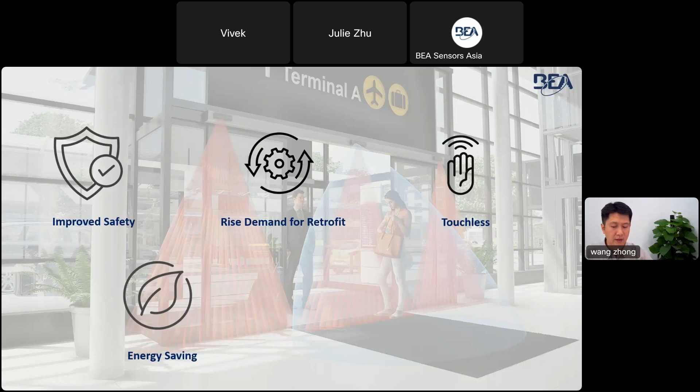Next is regarding energy saving, because the door entrance of the building is really strongly linked with energy saving. The door opening and closing easily loses cold air inside of the building, and in winter, the warm air also easily escapes from this entrance. So energy saving from the entrance is also a very important point, and it's becoming more and more important.

Last one is that the door currently not only functions like a door, just opening or closing, but it's also linked to more functions, such as security of the building, like access control function of the building or office, and also some emergency exits linked to the building management system. So the door becomes an important device of the IoT network. This is also an important development trend we observe.

Okay, this is the 5-point summary for the automatic door development trend.

Okay, so now we understand the market situation and development trend. Let's see how to secure a sliding door.

Before we start introducing the security of the sliding door, we first need to evaluate whether the door environment is a high risk environment or a tolerated environment. So how do we evaluate? Here is a short video to introduce that. It's according to the Europe EN standard definition.

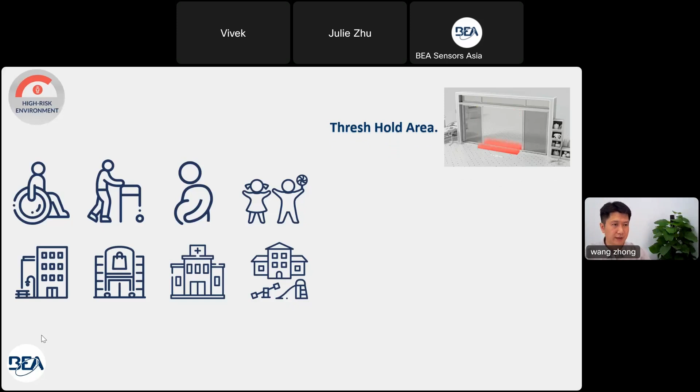So for this kind of high risk environment, what danger points do we need to pay attention to? First is the threshold area. Once the door's moving leaf is opening and closing, the front side and back side of the door leaf, a 20 centimeter area, should be protected. It is a danger point.

Next is the main closing edge, because in the middle, the two sides of the door leaf are closing, and people in the middle could be pinched and hit. It's also dangerous. And the side area - as I mentioned, if people, for example elderly people, stay on the side of the door to rest, once the door starts to open they can easily be hit. This is the high risk environment and the danger points for the high risk environment.

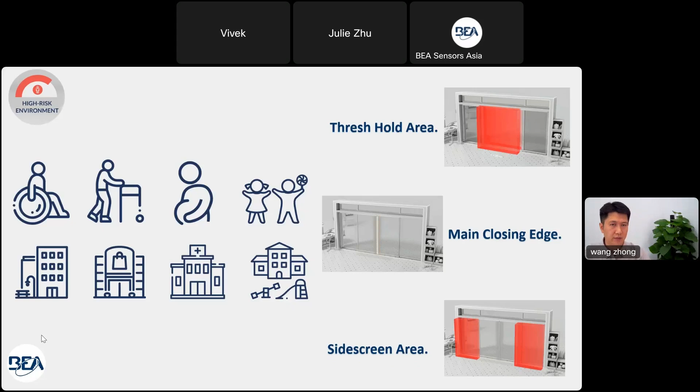Okay, so compared with the higher risk environment, how about the tolerated risk? It's for places like office buildings.

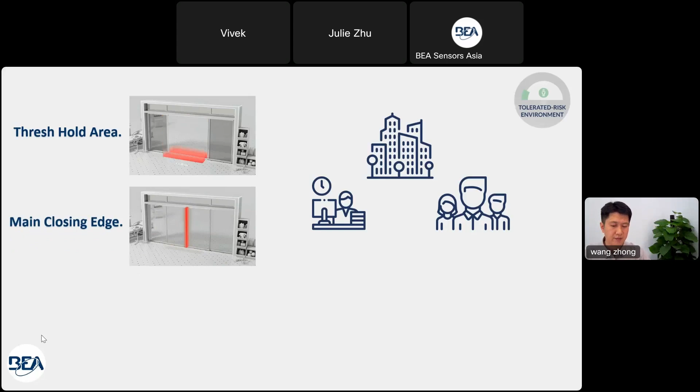But for the tolerated environment, what kind of danger points need protection? It's two sides: one is the threshold area, one is the main closing edge, which need special protection. But for the tolerated environment, there are some special cases we really need to be careful about.

One is for the door: once it's opening, if the gap between the opening edge and the wall is lower than 20 centimeters, this corner is still dangerous. So this corner still needs special protection, no matter if it's a higher risk or lower risk environment. This is a special point needing attention.

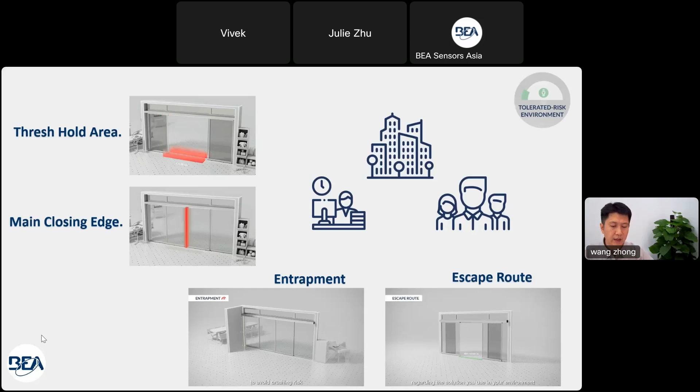Next is the emergency escape route. This is linked with accidents—if an accident happens, people need to quickly leave the building, so the door needs to open earlier. There's a requirement for the opening distance: at least 1.5 meters in front of the door, meaning once people arrive at the door it needs to be fully open already.

So these are the 2 special points we need to pay attention to. Even in a lower risk environment, these two are still required.

For the higher risk environment, we recommend the full safety solution—that means the door front side, back side, and both left and right sides need to be fully covered and protected. For the tolerated risk environment, we recommend partial safety, meaning two danger points need protection: the door threshold and the door main closing edge.

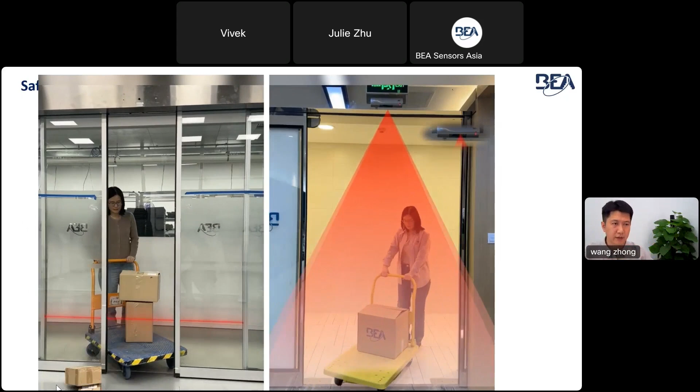So for the photo beam, we really don't recommend using it. Here we've listed 3 kinds of technology: photo beam, infrared curtain, and laser curtain as safety solutions for the sliding door. For the photo beam, neither installation, maintenance, nor protective performance are recommended.

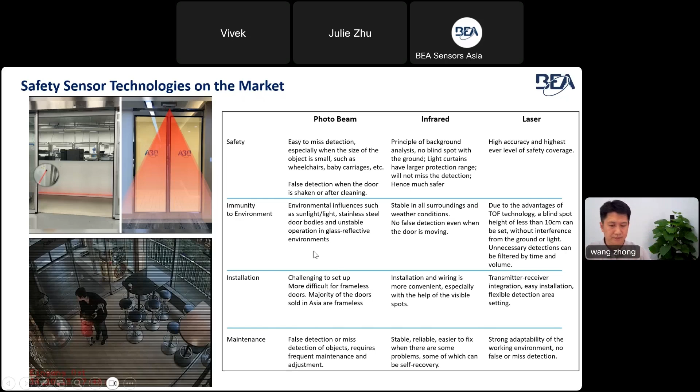Let's see in the Asia Pacific, different countries and regions, the infrared or laser curtain-based adoption percentage in the different regions. As we can see in Australia, Middle East, India, South Asia, the curtain-based safety solution is adopted very high. Even in Japan it's also very high. But in China and Korea, most of the doors are not infrared curtain-based.

Especially in China, we feel there is around 28% of sliding doors with no safety solution at all. Even the photo beams are missing, so it's quite not that good. There is a big room to improve the safety for the sliding door. For Korea it's similar, only 8% use curtain-based safety solution.

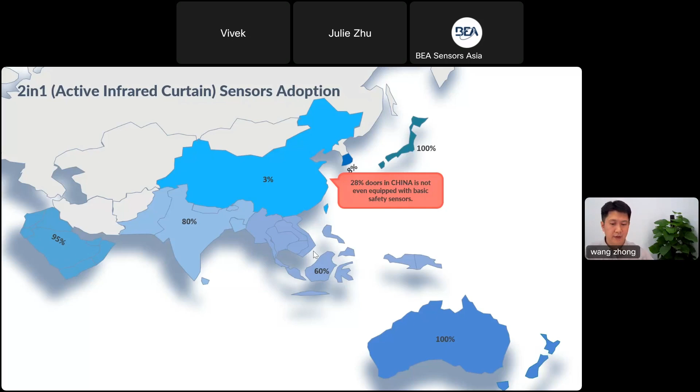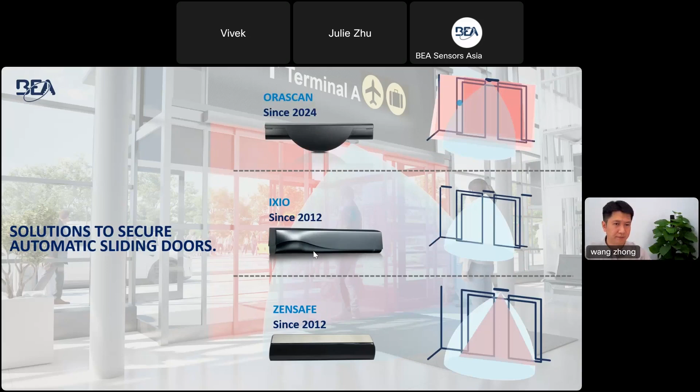So for the security of the automatic sliding door, we recommend 3 products. One is a basic 2-in-1 sensor, ZenSafe. Next one is IXIO, also a 2-in-1 sensor. Last one is the ORASCAN, which is based on the laser scanner and radar sensor together. Let's introduce the details one by one.

For the ZenSafe, the product has been in development from 2012 till today. It's already more than 10 years in use. This product integrates 2 technologies, radar and infrared curtain together. So for the function, it also has opening and safety, two functions in one sensor, as the picture shows.

So no need for additional opening or safety sensors to be installed - it's integrated in the one sensor. For the safety, there is one curtain that has 24 infrared spots, to protect the door threshold area. So it protects it very well.

For the ZenSafe, we also offer different configurations, which we call ZenSafe Combo and ZenSafe Kit. Combo means in the packaging there is one ZenSafe and an additional radar sensor together, which can be a total solution for one set of doors, outside and inside. With this configuration, it can be a cost-effective option for the users.

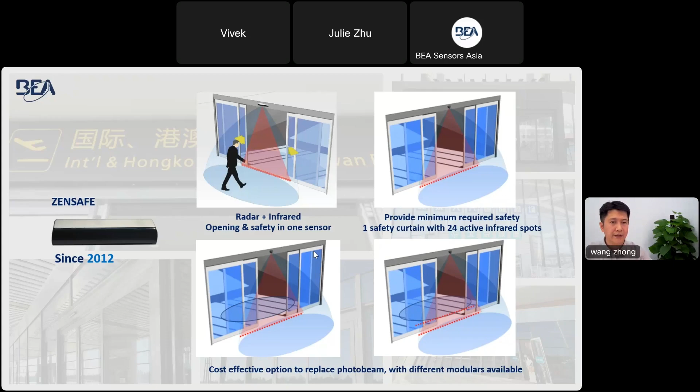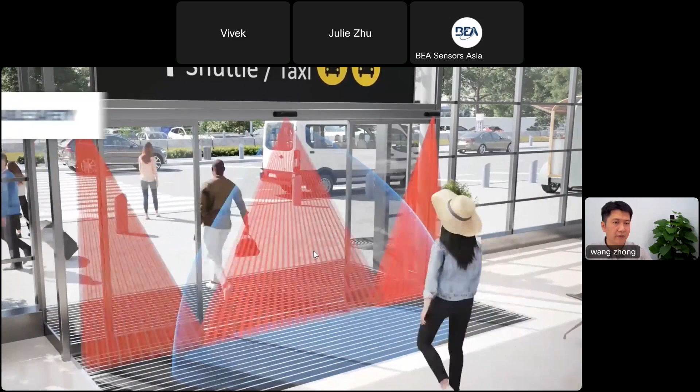Next one is IXIO. IXIO is a very popular product all over the world. We also launched this in 2012. Firstly, the product is quite safe - it's a reliable safety, because you can see in the video. The safety curtain has 48 spots. It's really a very good safety curtain to protect in front of the door.

Here the video shows we use a test body CE, which is defined by the EN standard. Using a very narrow side, 20 centimeters, and black cover, to put it in different locations in the curtain. You can see every position of the curtain can detect the black test body very well. This shows the detection capability is quite stable and reliable. From one side to the other side, any position can be detected and protected very well.

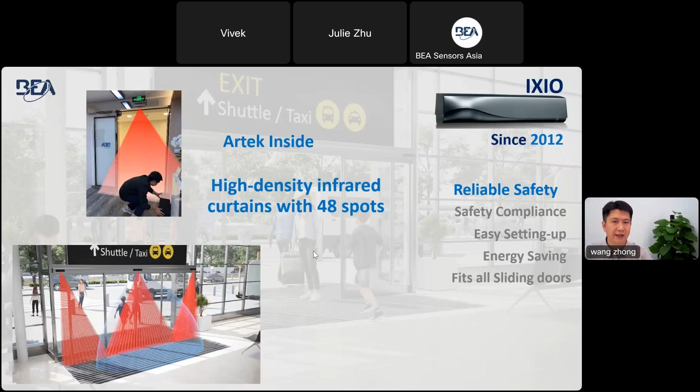So that's why we say this is a reliable safety. This curtain has two curtains, each curtain has 24 spots, so two curtains have 48 spots. So the safety is quite good.

And this product also complies with safety standards globally, like European standard EN, German standard DIN, and Australia standard AS. All of them are compliant. That's why this product is popular in all the different regions in the world.

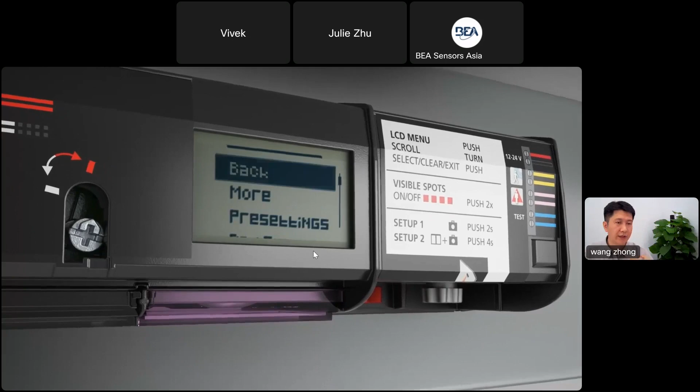And this product is also easy to set up, because it has an LCD to directly read the detection power meter, and it can be set up and read the sensor situation very well, easily, conveniently. So for the installer and the user, it's very friendly, and also has 4 visible spots to show the infrared curtain position very well.

It also has a QR code to read the parameter of the sensor directly, which helps for troubleshooting. So for the IXIO product, no matter the installation, adjustment, the position of the curtain, and troubleshooting - all of them are very convenient. This video shows the real visible spot in the field.

And because IXIO also integrates our newest radar module, Artek, this Artek can have unidirectional detection to make the door close earlier, and also have cross traffic rejection. Some people just move parallel in front of the door, but don't go inside the door - it can also be rejected. So it reduces unnecessary opening and also makes the door close earlier. With this, we can save energy for the building, which may come as cost saving from the air conditioner.

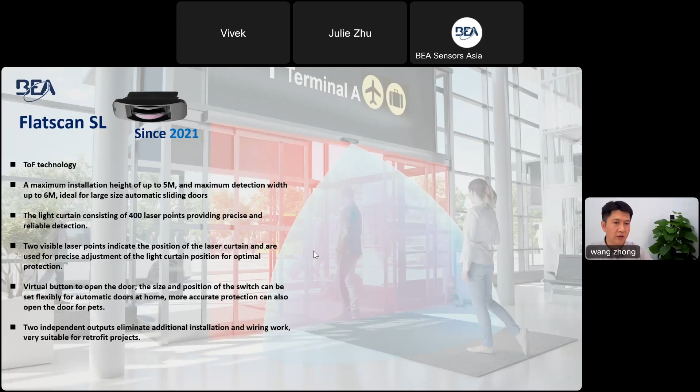This product can also set a virtual push button on the door to trigger the door to open. We have a video to show that.

This is a good example for a sliding door. We use the SL to protect safety, and we also set a virtual push button, the blue zone, to trigger the door open. Because this sensor has two independent relays to respond for opening and safety, it can also be used for the opening function.

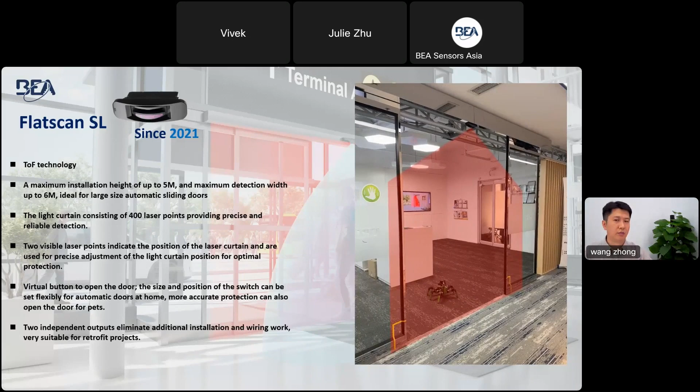Here you can see the video. We simulate a pet dog in the room to trigger the door open. Once the door opens, the curtain has 400 spots to protect people going in and out very well. So this product's detection capability is much higher than the standard defined, meaning it can detect very small objects and can be used for very high level safety protection.

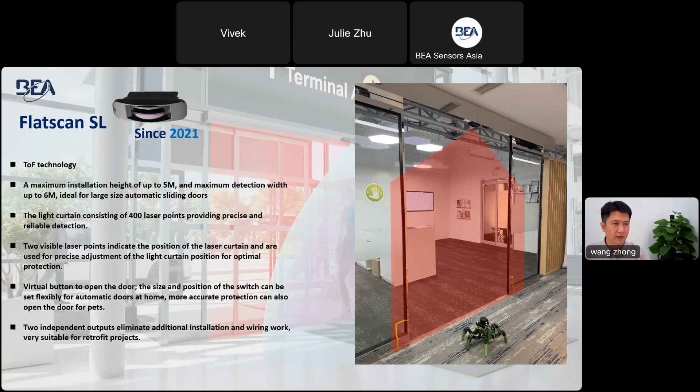So Flatscan SL is a very good choice because it has 400 spots in the curtain. A 2 or 3 centimeter object can be detected very well at 2 to 3 meter distance, so in a home it is a very good choice.

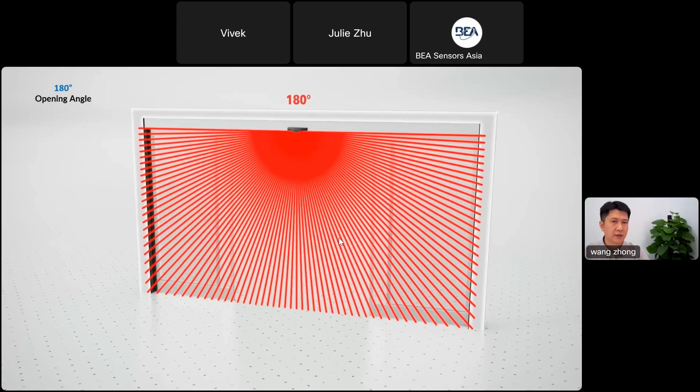This ORA scan also uses 2 kinds of technology: radar technology for opening, and laser technology for safety. This ORA scan has a 180-degree opening angle, fully covering the door with no gaps. It also has 5 curtains: 2 curtains in front of the door, and 3 dynamic curtains in the middle and back side of the door.

Each curtain has 250 laser spots, so the detection resolution is quite high, offering 100% safety coverage for the sliding door. The edge-to-edge maximum detection distance is 4.6 meters, so it can adapt to very high and wide doors with no problem. The recommended mounting height is 3.5 meters.

As we mentioned, for this ORA scan, it also complies with the safety requirements like close edge, threshold area, and side screen protection. The specialty point is this is only one sensor that can protect all of these danger points. On a reference infrared sensor, it needs one sensor installed in the middle, one on the left side, and one on the right side. So to fully comply with EN standard requirements, you need to install at least 3 sensors. But now for the ORA scan, only one sensor is installed, and it can cover all of the different danger points.

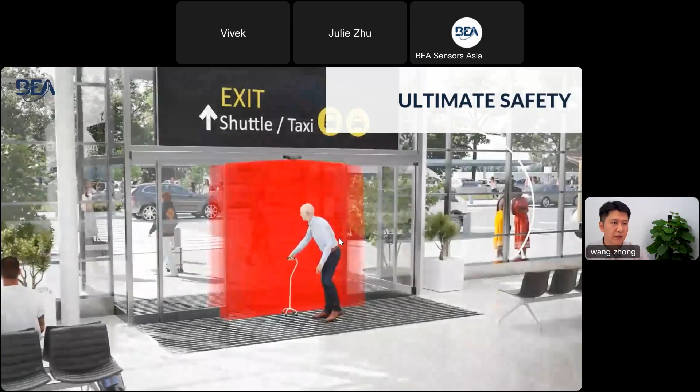We call this ultimate safety, because each curtain has 250 spots. It can detect the hand and arm very well, with no risk. So 5 curtains—2 curtains fully cover the front side of the door and the side screen.

3 curtains are dynamic curtains. Once the door opens, the protection curtain becomes wide. Once the door slowly closes, the detection field also closes at the same speed. Once the door is fully closed, then only 2 curtains in front of the door are working.

So once the door is installed, with one ORA scan inside and one installed outside, that means 10 laser curtains cover the front side and back side of the door, fully covering the door danger points. That's what we call ultimate safety.

So any risk of contact is avoided. 100% coverage of the door—2 lasers secure the whole door and 3 dynamic curtains follow the movement of the door leaf.

This ORA scan also supports virtual push buttons—4 kinds of virtual push buttons can be set, like the video showed. It's very convenient for hospital doors, because in a hospital the doctor mostly uses their foot or arm to trigger door opening, not an automatic door sensor. So for this kind of door, no need for an additional opening sensor or foot trigger sensor on the wall—just set up a virtual push button at the location where you want to trigger the door.

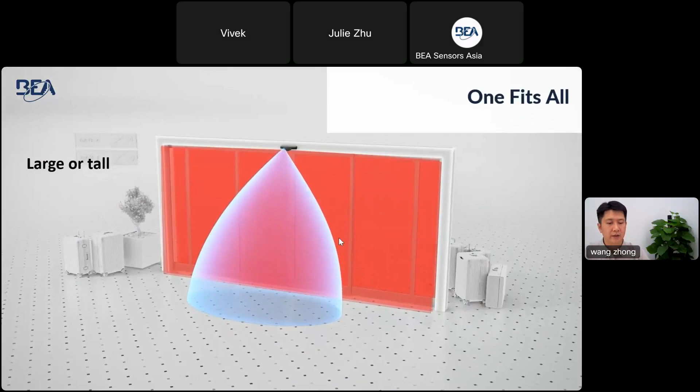So we see the ORA scan is a one-fits-all solution for different kinds of doors—very wide doors, very large doors, telescopic doors, hygienic doors, fire doors, escape routes. All of these different door types can be adopted.

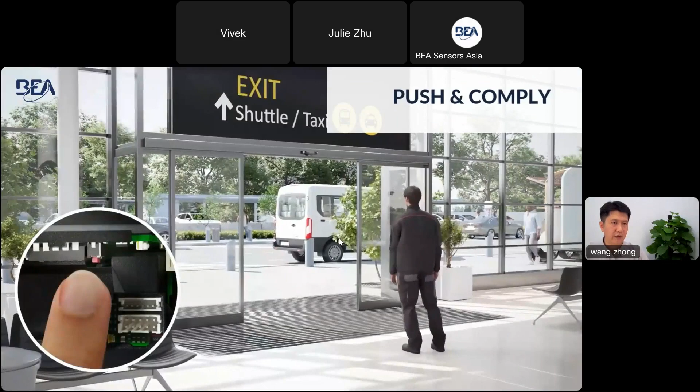So for such a rich-function and high-level safety sensor, how do you set it up? Actually it's very simple and easy. There is a push button on the sensor—we just push it, and the sensor automatically measures the height of the door, the width of the door, and the speed of the door movement, then automatically defines the safety area.

Front side of the door, back side of the door, and the side screen field can all be automatically set. The installer and user don't even need to do anything. It's a very intelligent sensor—a smart device, very convenient and friendly for installers and users.

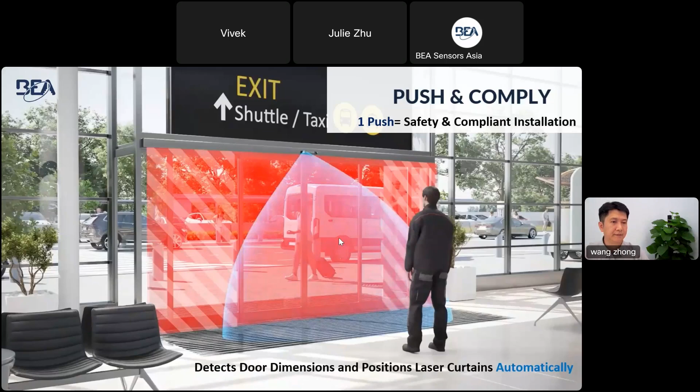We also offer a mobile app that links with the sensor via Bluetooth to read detailed parameters and make accurate settings for the sensor.

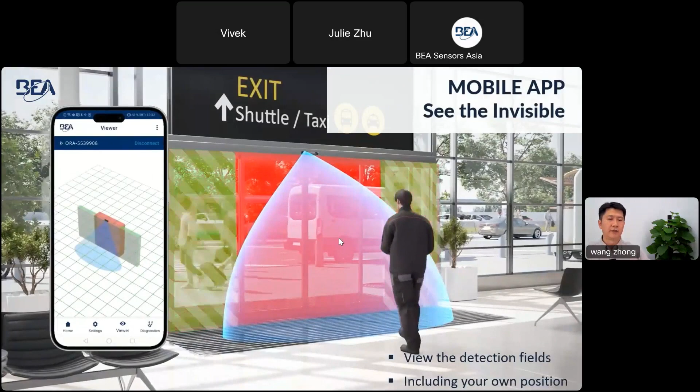We also offer a view function. After installation, if you want to check whether each detection performance area is correct, you can use the view function to see the app show in real time the detection position and whether it triggers output or not. It's very convenient to ensure the sensor is correctly installed.

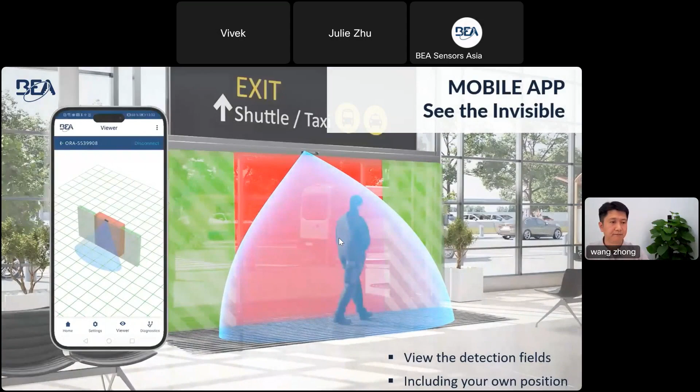For the virtual push button, it only triggers in the area you set. For other areas, it doesn't trigger the door to open. Only the virtual push button area triggers door opening, so the virtual push button works well.

A maximum of 4 virtual push buttons can be set. This is RTech inside technology that can filter parallel movement—it only opens the door once a person moves in front of the door, moving toward the door.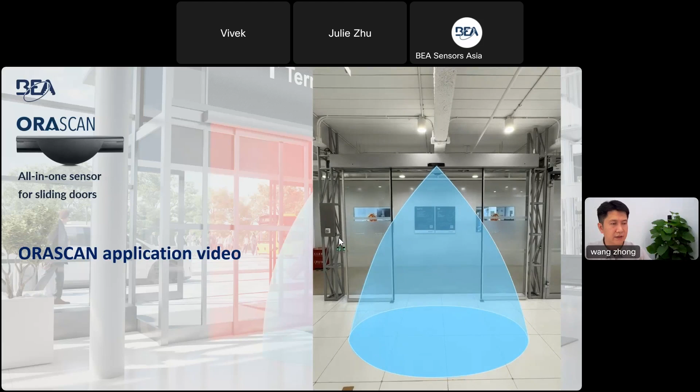Okay, so for the ORASCAN, it's designed with 2 kinds of technology, safety compliance, ultimate safety, energy saving, touchless, and it has a mobile app, and can be adopted on all kinds of sliding doors. So that's why we call the ORASCAN an all-in-one sensor.